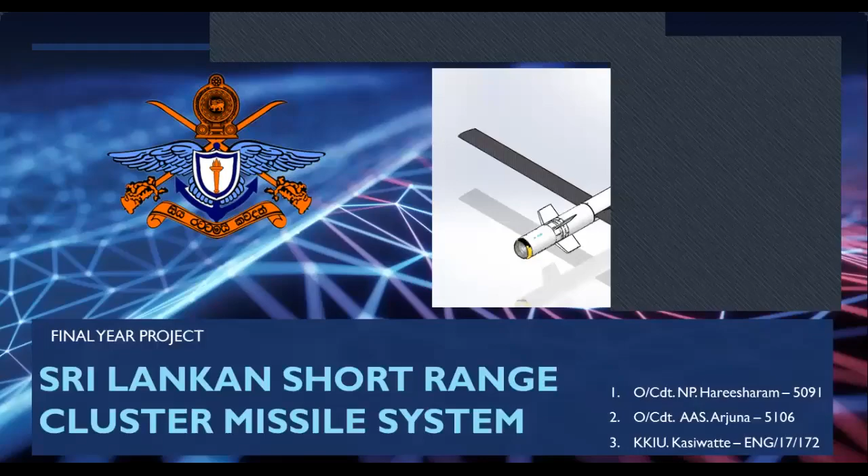Good morning. Our final year project was the Sri Lankan Short Range Cluster Missile System.

Let me give you a brief introduction about what is a missile. An object propelled by a force to a target, either by hand or mechanical weapon, can be defined as a missile. In modern language, a missile is also defined as a guided missile or guided rocket, is a guided airborne weapon capable of self-propelled flight, usually by a jet engine or rocket engine.

What is a cruise missile? Cruise missiles are the most advanced and effective weapon systems available right now. Cruise missile systems comprise a very flexible platform where we can use them for various war strategies. In missile guidance, a guided missile is one which receives steering commands from the guided system to improve its accuracy. The autopilot is an automatic control device for maintaining the spacecraft's optimum flight path.

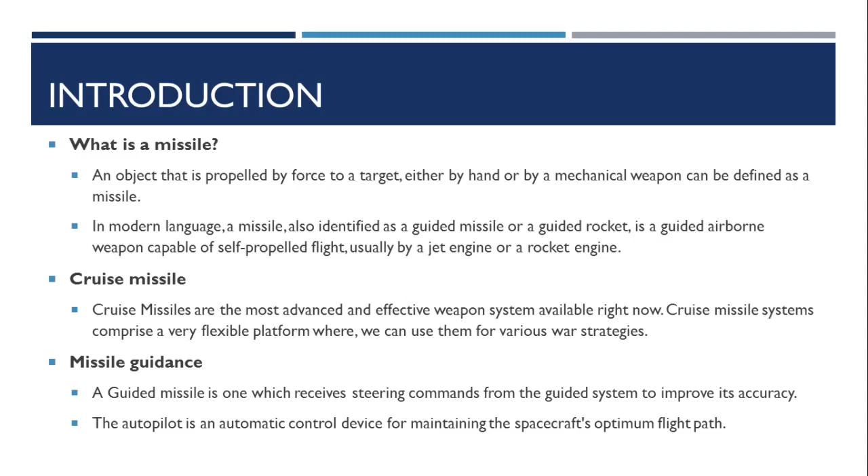Our requirement, or the purpose for selecting a project like this, was the major problem statement we came across: missile systems available in Sri Lanka are not precise enough to initiate surprise attacks, and they need to be handled by professionals. Existing cruise missile systems are very expensive. Besides, the already existing cruise missile systems need precision guidance systems like radar, IR, laser rays, or satellite guidance.

Our overall aim is to develop a fully autonomous cluster of high-precision cruise missiles with onboard guidance systems which can overcome all types of terrain and enemy countermeasure challenges.

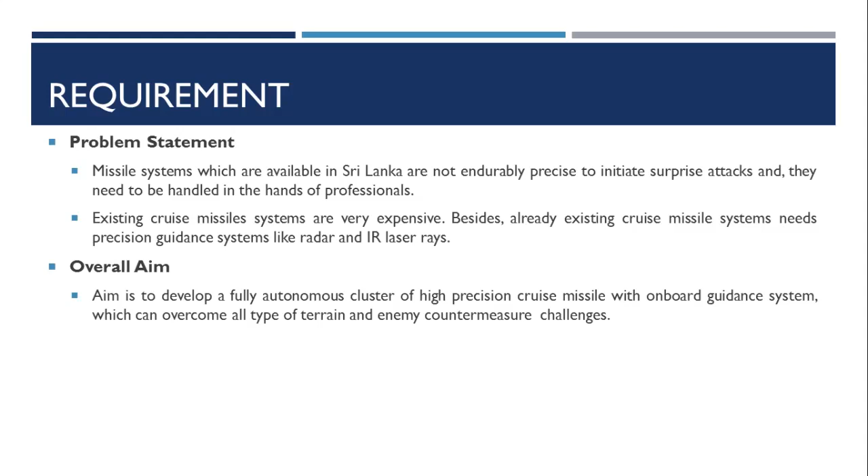Our objectives for this project: design a test module to check the working condition of all electronic components, which is simply a prototype to test the waypoint and guidance system.

Modifying a Digital Scene Matching Area Correlator, or DSMAC algorithm, to run on a low speed processor, which helps with the optical guidance of the missile.

Changing the secondary propulsion system to electrical ducted fans, or EDFs, to reduce noise, cost, and heat emission. Changing the primary propulsion system to solid propellants, which were the best propellant type we came across throughout our research, to reduce the cost of the missile.

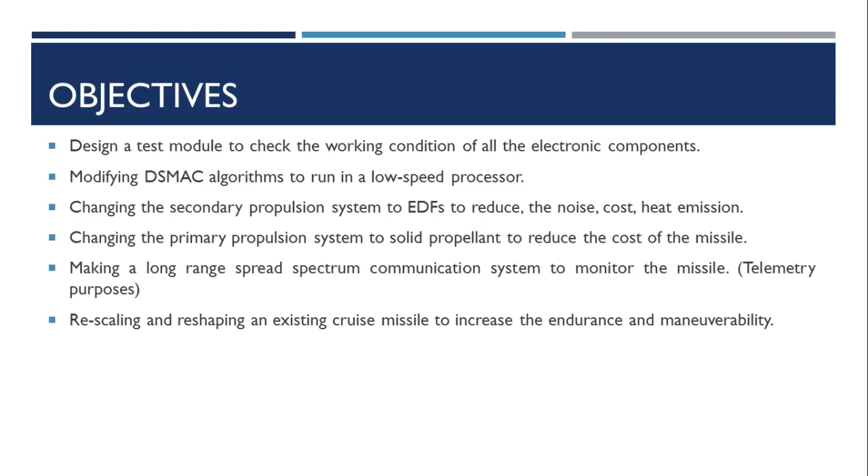Making a long-range spread spectrum communication system to monitor the missile for telemetry purposes, where we need to communicate with the missile throughout the mission until it hits the target successfully. Another objective was to rescale and reshape an existing cruise missile system to increase endurance and maneuverability.

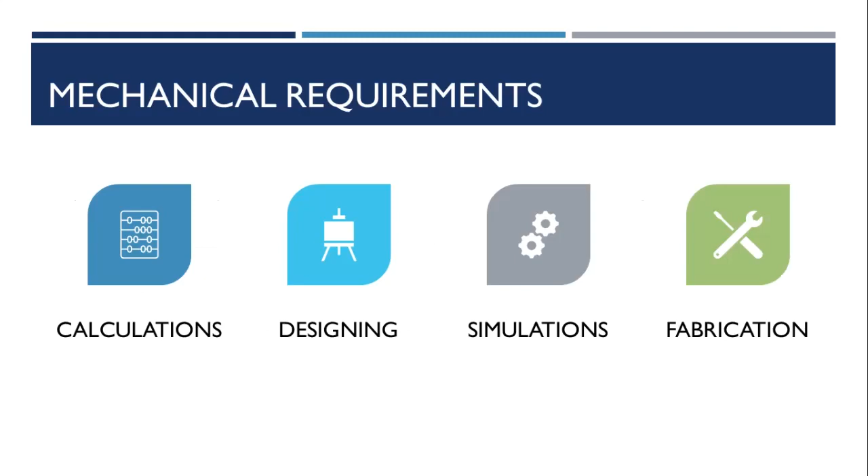Our mechanical requirements were calculations, designing, simulations, and fabrication. Major calculations were done on the main wing, back wing, stabilizer control surfaces, and in the wing mechanism we focused on motor selection, gear calculation, and spring selection.

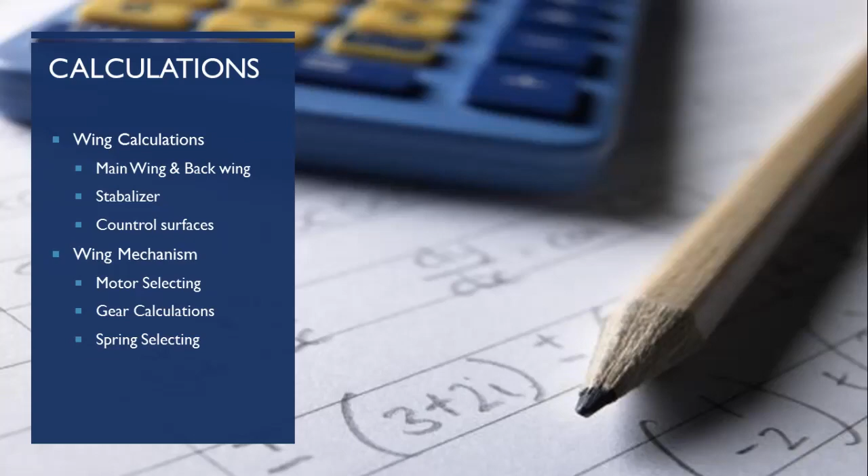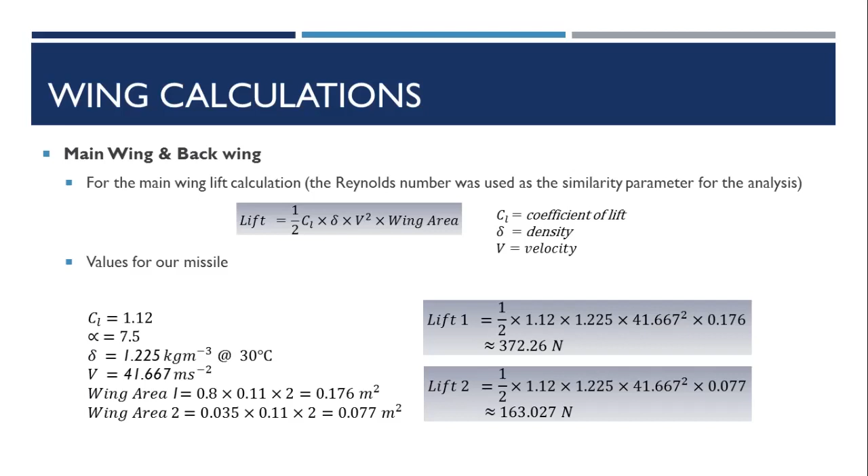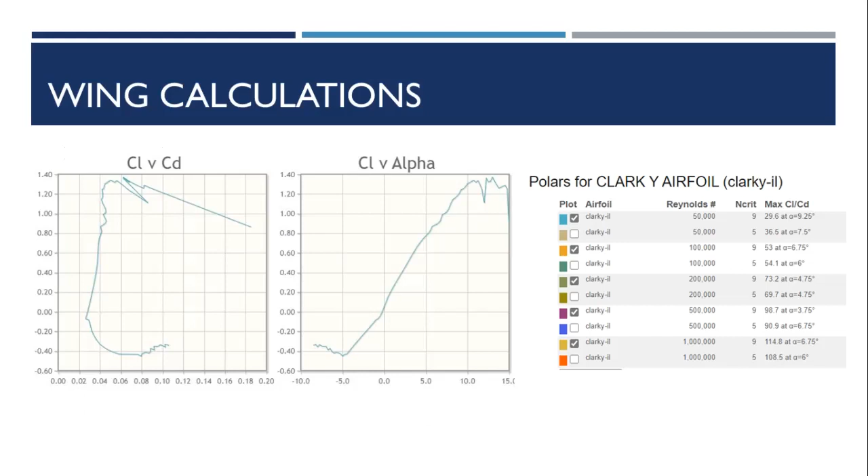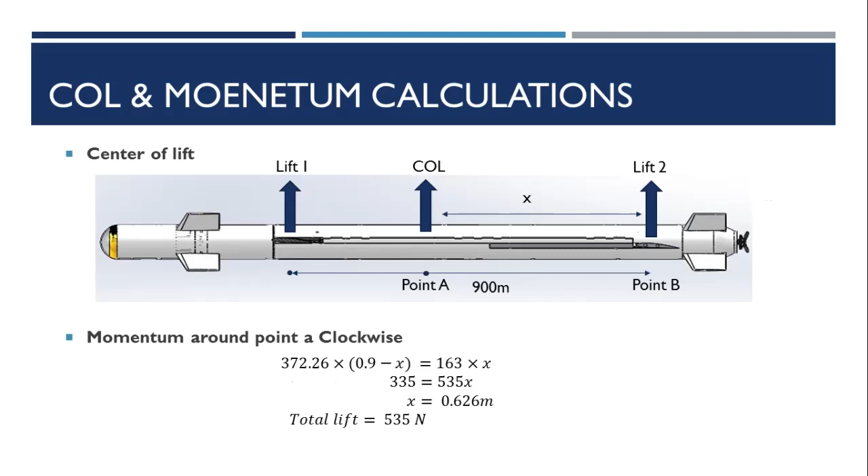Our center of lift and momentum calculations are depicted here, done according to the given parameters. Our spring selection calculations are depicted here also.

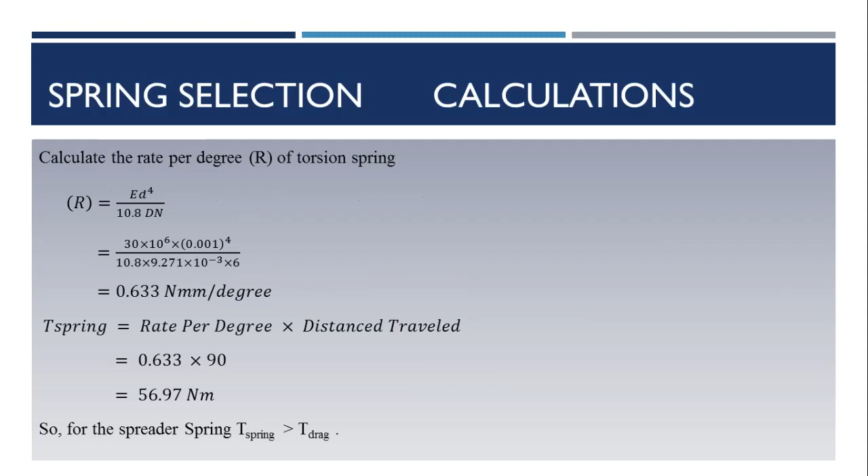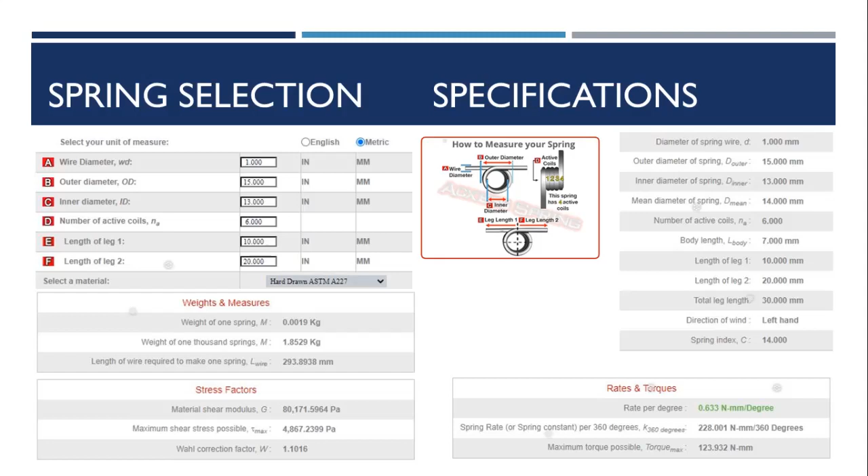The spring calculations were done for the rate per degree, distance traveled, and drag forces. Here are the spring selection specifications. The reason to select this spring was that it has more power and is suitable and compatible with the missile dimensions. It is low cost and available, which is a good advantage for our missile.

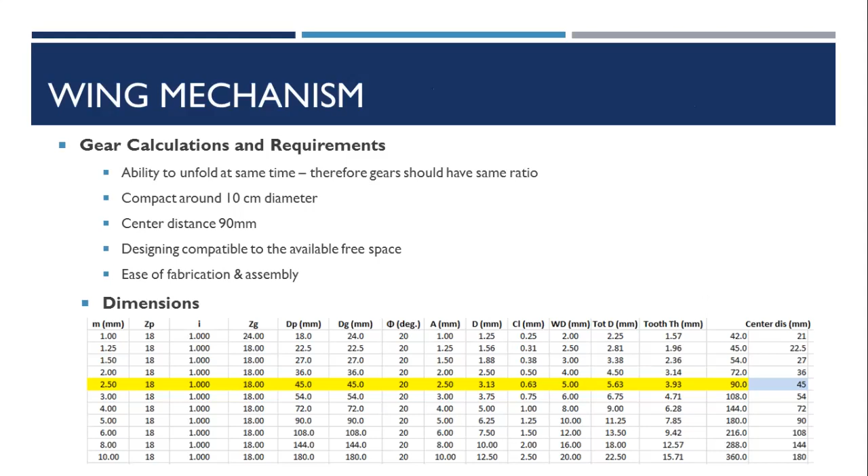Here are the wing mechanism and motor selection specifications, and the gear calculations and requirements of the wing mechanism, for the ability to unfold at the same time. Therefore, the gears should have the same ratio: compact, around 10 centimeter diameter, center distance 90 millimeters, designed to be compatible with the available free space, with ease of fabrication and assembly. Here are the dimensions.

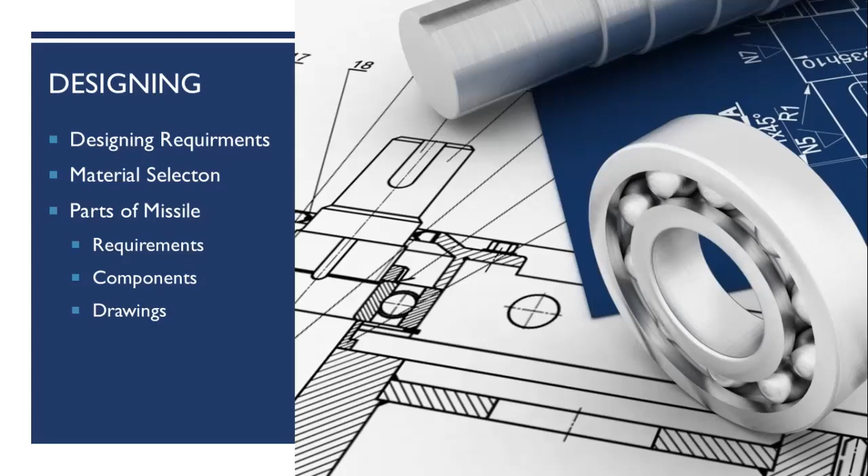Now we talk about the designing. We focused on designing requirements and material selection for parts of the missile. Designing requirements were the test fly model, ground control unit casing, rocket nozzle, and maintaining area in the missile to prevent radar indications, a cruise speed of 150 kilometers per hour, and maintaining less weight as a main objective of our project.

Durability, strength, and budget should be within 1 lakh, where we need to build a low cost cruise missile system compatible with Sri Lanka, and the partition should be removable.

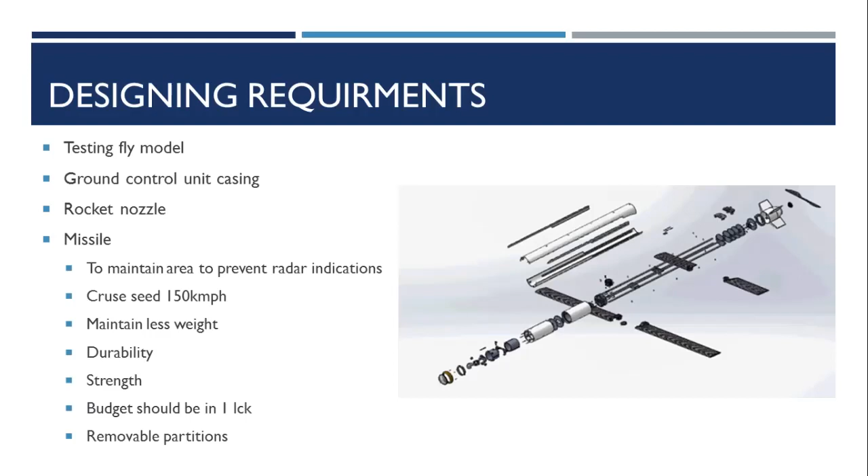If we talk about the test fly model, we took a VTOL type fly model to test our guidance algorithm. To test all the control unit and glide system, we have done a test model.

Requirements were a weightless design, control surfaces powered by servo motors, a strong motor mount, and carrying space for the control units. The design was used as a sample design of the VTOL, and KT board was selected as the body material for the aspect of lightweight.

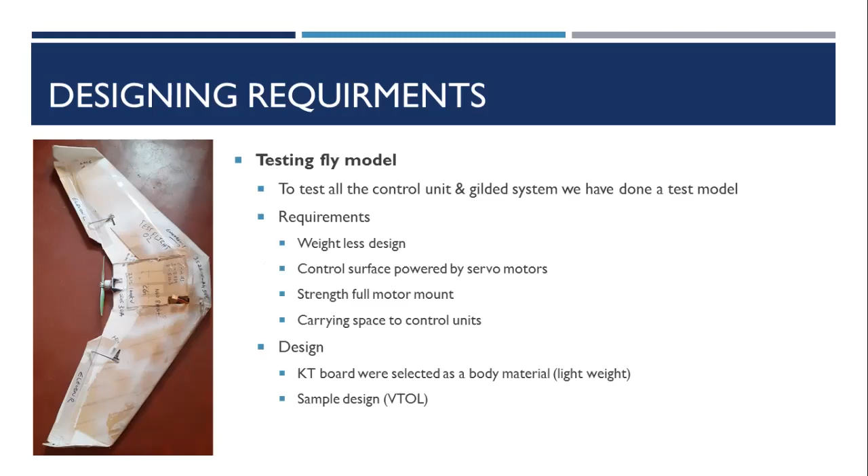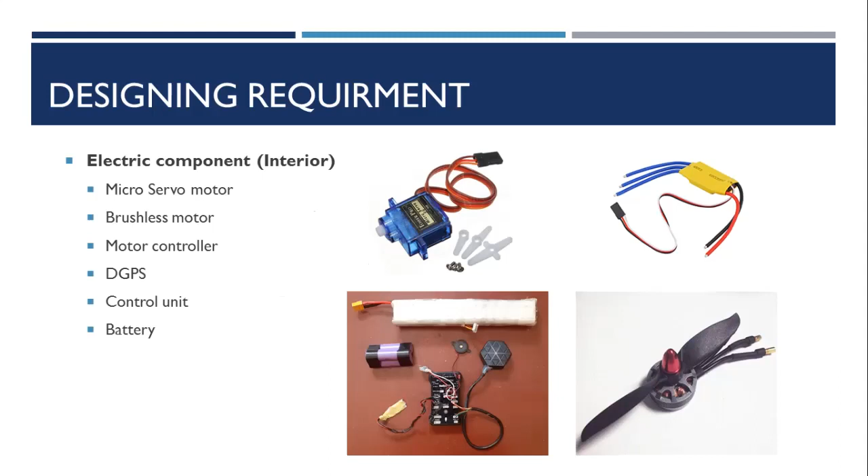Electric components in the interior of the flight module were the micro servo motor, brushless motor, motor controller, and DGPS for the guidance system, control unit, and battery pack.

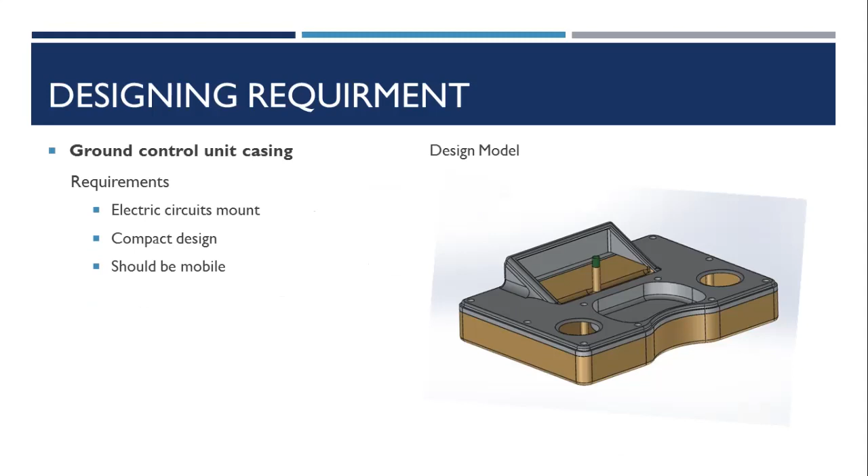Designing requirements of the ground controlling unit casing: the ground controlling unit is the main one which commands the missile or airborne object. Requirements were electric circuit mounts, compact design, and it should be mobile. This is the design model of our ground control unit casing.

In the material selection, we used glass for the front where the camera is enabled, so it should be visible for the camera, and plastic PLA for the front casing and main explosive holder. Aluminium pipes of 10 cm for the body structure, which are durable and lightweight, fiber body casing, carbon fiber wings, and aluminium for the wing mechanism.

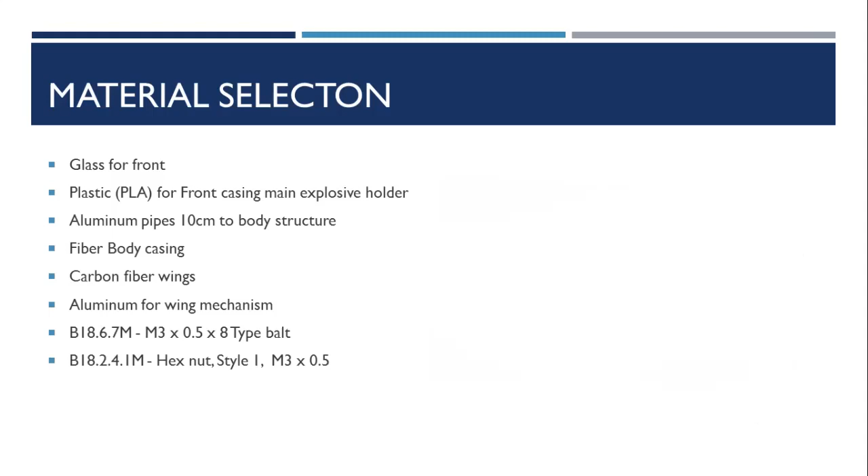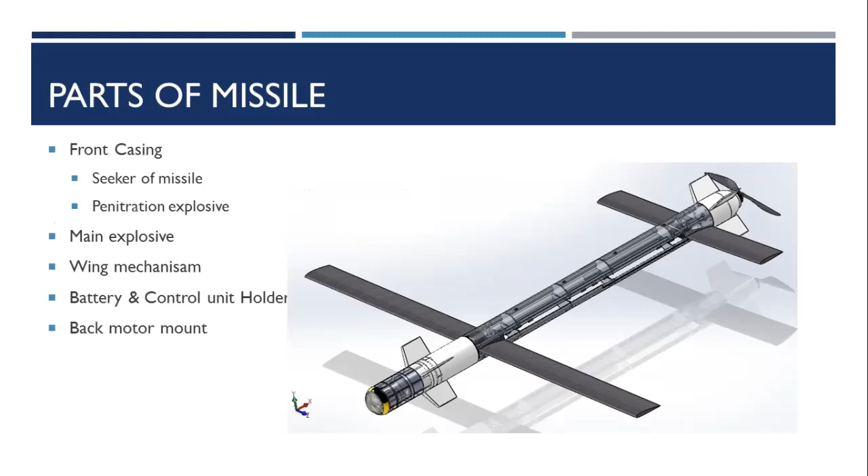Parts of the missile. The main parts are the front casing, which includes the seeker of the missile and penetration explosive, then the main explosive, wing mechanism, battery and control unit holder, and back motor mount. This is the missile parts depicted in this picture.

Front casing and explosive container requirements: strength and less weight must be maintained, ease of assembly, proper wiring, carry camera mechanism, and shaped explosives container.

Mentioned here below are the design models of our front casing, the shaped explosive holder, and the main explosive holder. This is the prototype model of our missile, showing the structure of the body, and here is the main explosive holder.

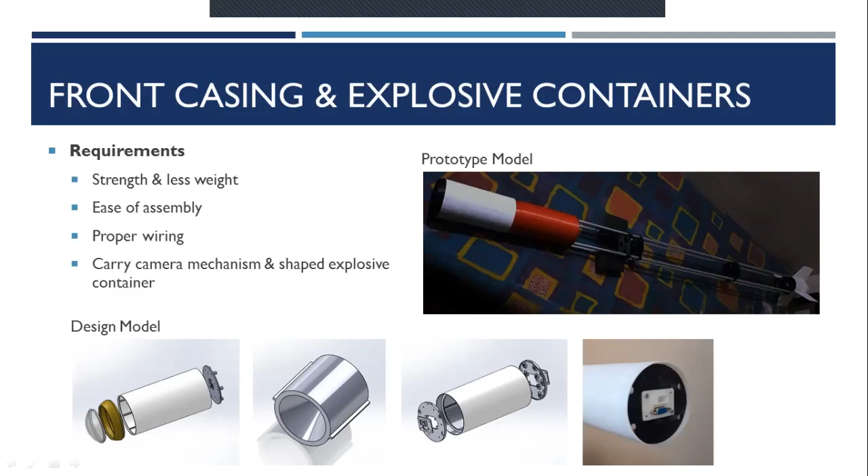The requirements for the seeker of the missile: compact design with 10 cm diameter, vibration enabled, smooth movement, 2 degrees of freedom, and ease of assembly.

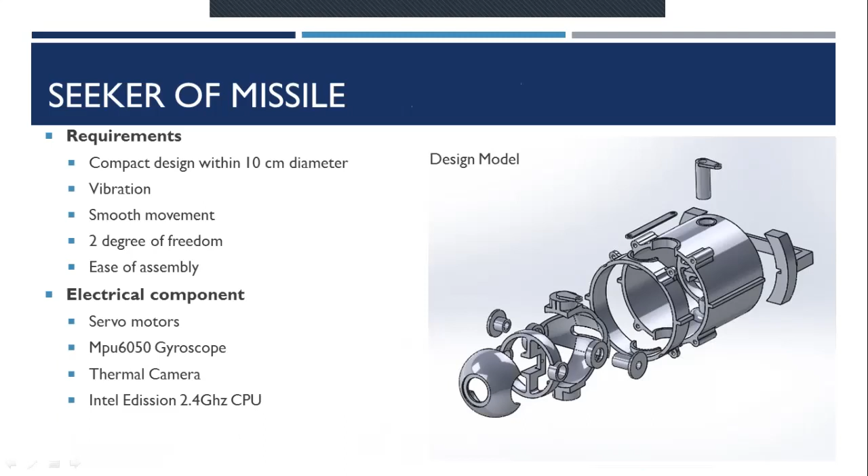Electrical components are servo motor, MPU 6050 gyroscope, thermal camera, and Intel Edison 2.4 GHz CPU. This is the design model of our seeker, and this is the prototype model, or the final output, of the seeker of the missile.

Wing mechanism requirements: it should fold within 24 cm diameter before launch, unfold simultaneously, and have the capacity to bear the full weight of the missile. Proper locking mechanism after unfolding is needed, otherwise due to drag the wings would fall out. It must maintain sufficient power to unfold the wing against the drag force.

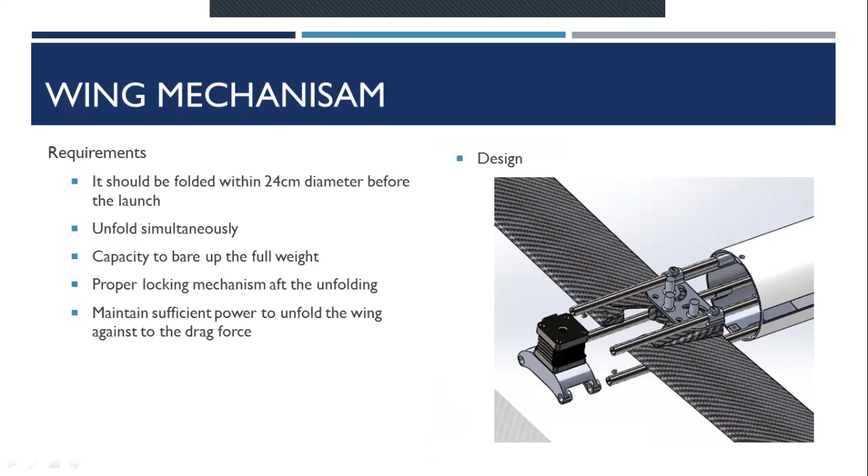This is the design of our wing mechanism. The weight of the wing depends on the structure inside the wing and the plastic infill. Missile wings require high strength, and this is our design to maintain good resistance against drag on the wing. These are our final outcomes.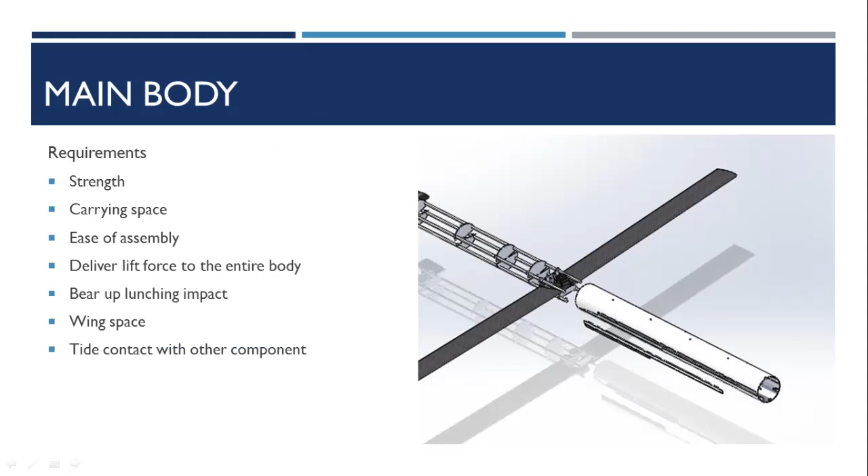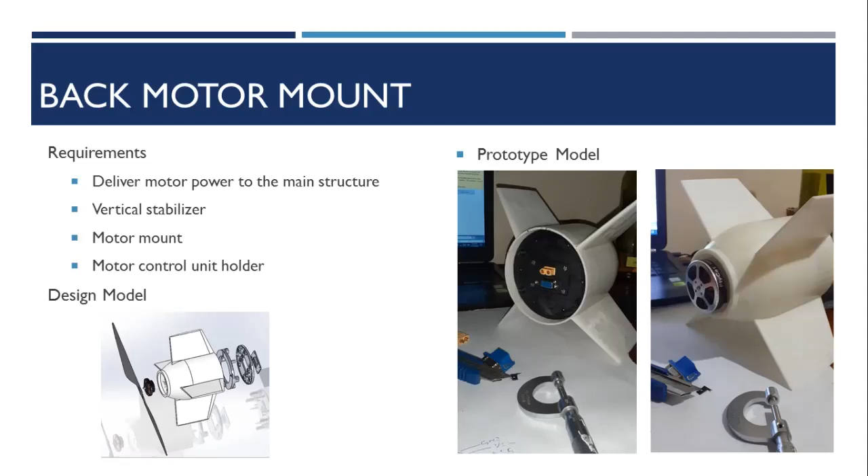Finally, the back motor mount requirements. The back motor mount is the secondary propulsion system where the EDFs are contained. It must deliver motor power to the main structure; vertical stabilizer, motor mount, and motor control unit are the requirements of the back motor mount. Here is the design model and the prototype model of our back motor.

For the simulation, flight model simulation, total drag simulation, and rocket booster material selection simulations were done. This is the flight model simulation, and the parameters are mentioned here.

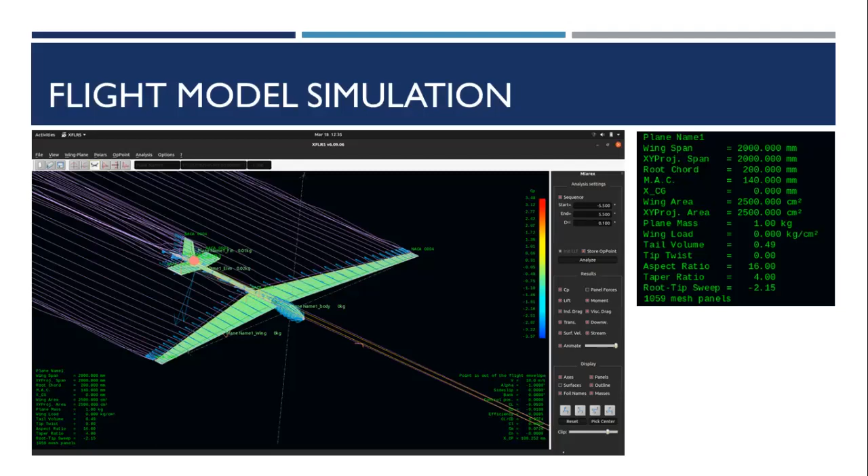For the drag simulation, as per the XFLR5 simulation, our missile can travel up to 200 kilometers per hour. Our prediction was that the maximum cruising speed is selected as 200 kilometers per hour, and at that speed the drag force produced by both wings is...

4,250 grams. Here is the drag simulation of our missile.

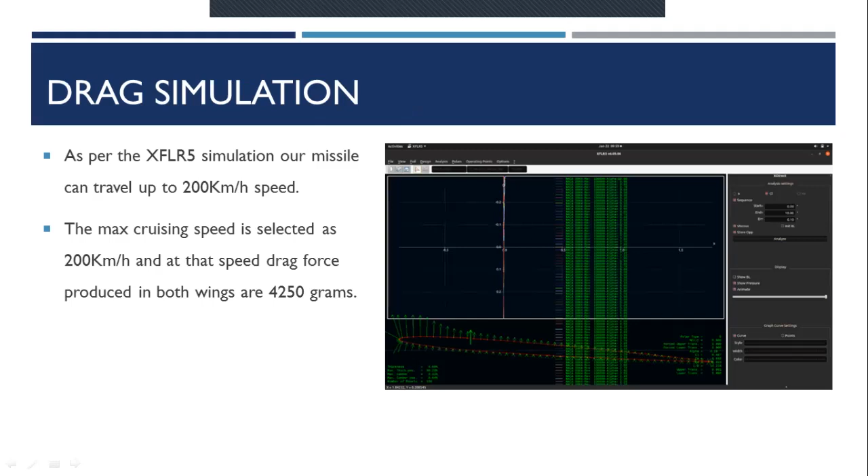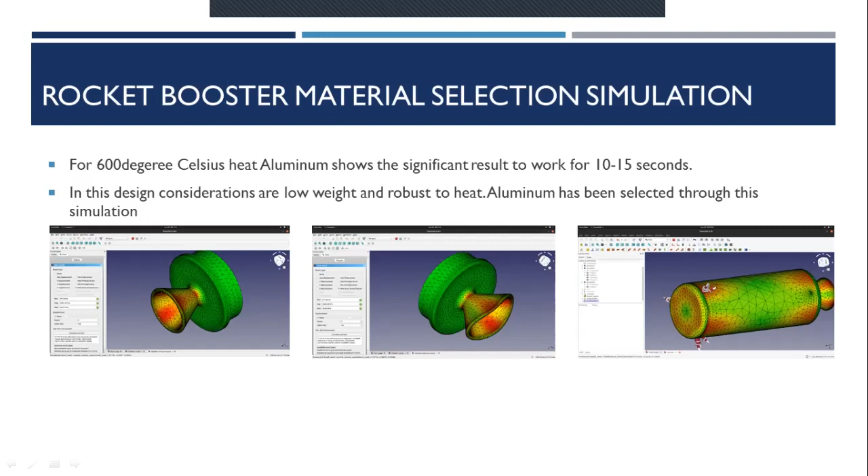For the rocket booster material selection simulation at 600 degrees Celsius heat, aluminium shows significant results to work for 10 to 15 seconds. In this design, the considerations are low weight and robustness to heat. Aluminium was selected through this simulation. This was our primary rocket booster shape, and it showed some deformations due to heat, so this was the final rocket booster design.

For the ANSYS simulations, we faced some difficulties trying to prove the projectile behavior of the missile. It consumes more meshing time and requires a high performance computer.

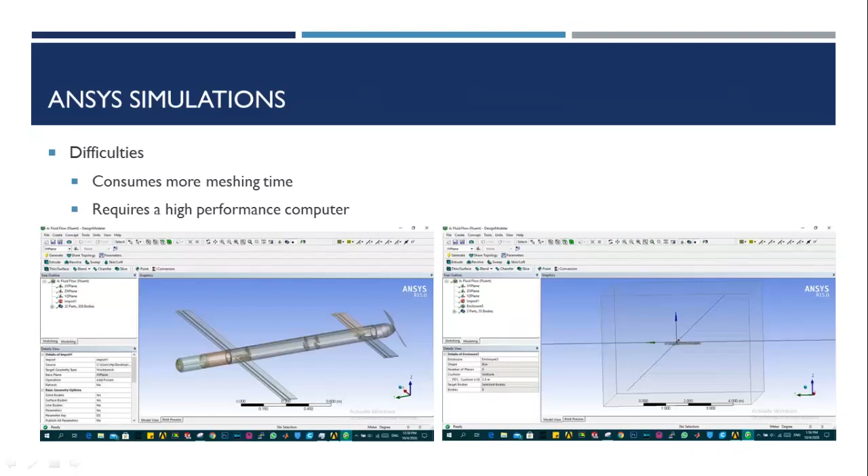For the fabrication of the missile, we used plastic 3D printing and fiber. For the plastic 3D printing process, we initially made the SolidWorks design, then sliced it, and gave it to the printer for printing.

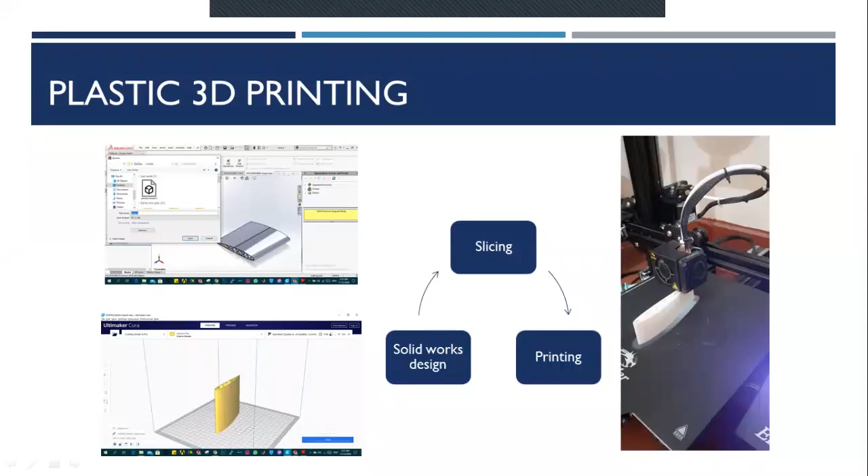Now for the outcomes: results, discussion, conclusion, and recommendations. Some compact, strengthful design was received as the outcome, and the selected material for the internal structure rods was carbon fiber due to cost and difficulty.

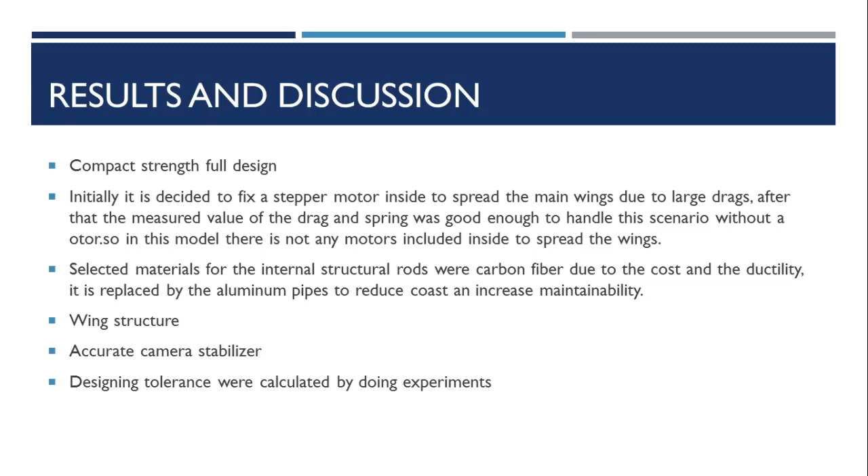It is replaced by aluminium pipes to reduce cost and increase maintainability. The wing structure and accurate camera stabilizer designing tolerances were calculated by doing experiments.

Conclusion and recommendations: the missile is entirely made with fiber to increase structural strength, which increases weight and reduces payload. It is required to refabricate the body with carbon fiber as a sufficient method to increase the payload, which also increases the strength of the missile.

The primary propulsion system selected is Propel BLDC, since we were unable to acquire an EDF during the project duration. It can be upgraded into a much more powerful BLDC or EDF fan, which will increase the payload of the missile or reduce the wing size.

The system we have developed fulfills the requirements of low cost, less complexity, simplicity, and accuracy.